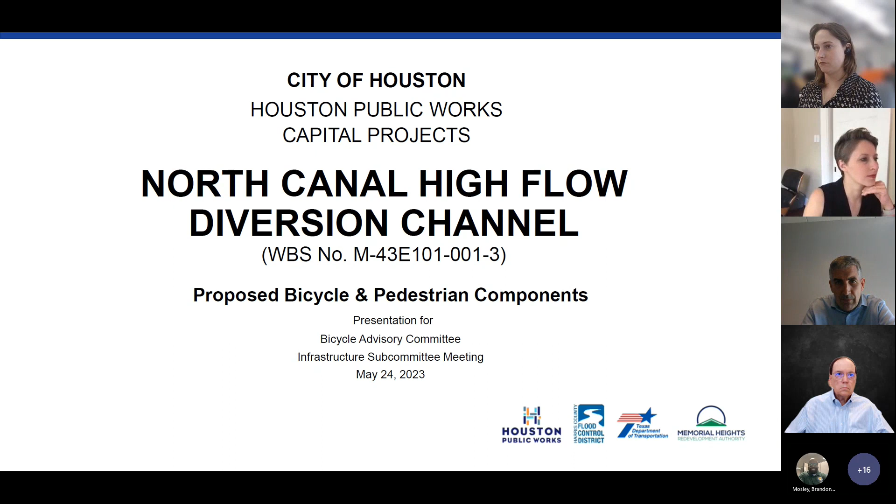Okay great, so I'll begin - I'll just flash my face for a bit so you can recognize me in the building or outside the building. Hello. So this project - well, I was asked by Tom Compson, he had a couple of questions, so I hope I'm able to answer his questions throughout the course of this presentation. But if you folks have other questions, or if he has other questions, feel free to stop me and we can discuss those as I'm going or at the end. Essentially, my presentation is intended to review the North Canal High Flow Diversion Channel project - that's my project, where I'm the project manager for the City of Houston. I work in capital projects, and the focus of this presentation is to review the proposed bicycle and pedestrian components of the project, and look at impacts to the existing facilities during construction and how we're accommodating for that. Next slide.

So let's give a real quick overview of some intro information. The project is federally funded, with a 35% federal component and roughly a 65% local component. Local funding partners are Flood Control, TIRZ 5, TxDOT, and the city is also a funding partner as well as leading the effort.

The city was the one who submitted the Harvey HMGP Hazard Mitigation Grant application, so we get the honor of leading the effort, and we're certainly coordinating with all those folks throughout the design effort.

The purpose of the project is simply this: it's not to mitigate for any one particular CIP project, city CIP project. It's really flood damage reduction. So we intend to make these improvements and reduce the floodplain within the project areas wherever we're impacting, or wherever we can make that impact.

Also, aesthetic enhancements are not a part of the federal FEMA scope. We can't create new trails or create new features such as that. But what we will be doing is replacing any impacted facilities.

So I'll turn that off. But what I can say is the project has another partner, a future amenities partner: Buffalo Bayou Partnership. At the North Canal area, they'll be the folks you'll see in the slides as we get to those, where they'll be providing those aesthetic improvements.

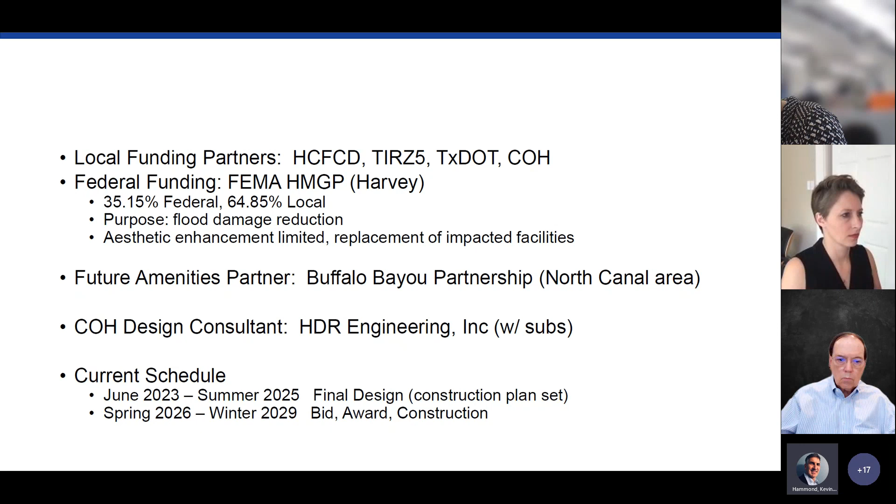Then we'll submit all that to FEMA, they'll hopefully approve our effort and award us FEMA Phase 2 construction. Then we'll move on to construction, a bid-award construction beginning spring of 2026 and running for roughly 3 years. So, next slide.

Okay, so this is the overall entire project limits. There are three primary areas here. I'll begin on the left side of the screen—that's the upstream-most component, the Yale Heights area. Yale Heights actually has a west and east component, but I'll dive into each of these areas in detail after the slide.

Overall, Yale Heights is the far upstream area on White Oak Bayou in the vicinity of I-10. Working downstream on White Oak Bayou, it strikes Buffalo Bayou at the confluence—that's the main feature of the project, the North Canal Diversion Channel. The cyan highlight shows the project limits per these areas. The North Canal Channel connects White Oak Bayou at the upstream end, pushes through developed property, city right-of-way, an active rail line, a Metro bus facility, and then connects that new channel segment with Buffalo Bayou on the downstream end.

The last component, the most downstream one, is the South Canal Channel or diversion detention area—again that's the cyan area. It's currently shown underneath existing I-59/I-69 infrastructure. The expectation is that TxDOT will come along with the North Houston Highway Improvement Project, relocate their infrastructure per their plans to the south, and allow the city to provide our enhancements in that area. It's essentially a smaller version of a canal in that section.

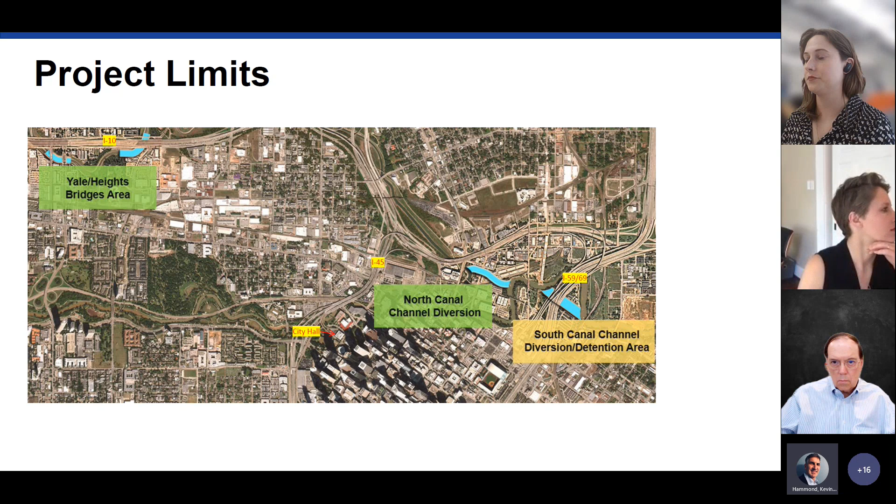So I'll dive into each of these areas beginning at Yale Heights. Next slide, please—Yale Heights area, next slide.

So this is a good before and after photo, from the city's preliminary design effort, from HDR's effort. On the left side, you'll see the existing White Oak Bayou channel, looking upstream at Yale Street.

It's a concrete lined channel with sloped side slopes. The important feature for you folks is on the left side of that image, the White Oak Bayou Greenway Trail, an existing off-street bikeway. The city's effort here is to improve conveyance, to move more water through that cross section. The way to do that is shown on the right side as proposed: we'll be widening the bottom width, removing the sloped sides of the channel, creating vertical walls. But the important thing is that we're retaining that White Oak Bayou Greenway Trail.

We don't intend to impact that trail. There will certainly be a drop off there, and we are providing railing for safety. But that essentially is the improvements, both at the Yale Heights area, the west side, and then the east side at Studemont. I think the next slide will show you the two areas in plan view.

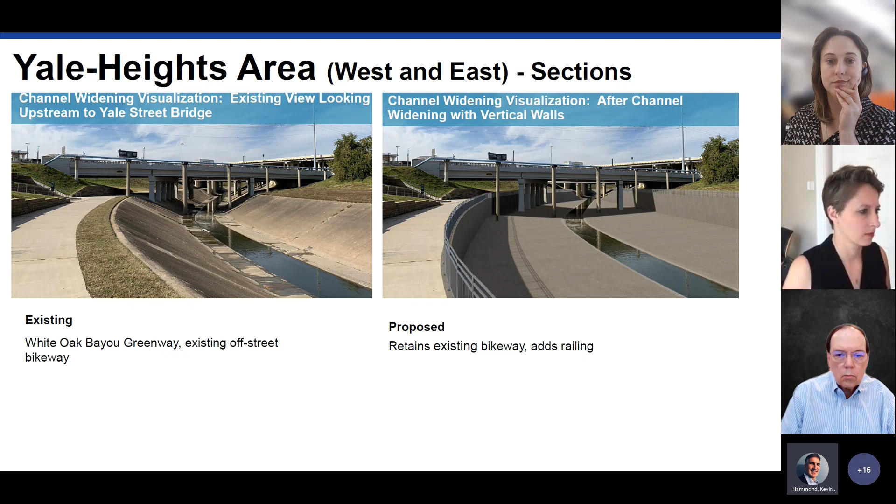So the left of the upper half of the screen is the west side improvement, around the Yale and Heights Boulevard area. It's probably tough to determine what's happening here, but essentially it's trying to convey that the tubular-like structure winding through the bayou represents the limits of work for the North Canal Channel.

So it's really just removing the slopes and providing a vertical drop to widen that bayou. On the right side are the east side improvements at Yale Heights, essentially the same thing—we're widening the bayou and retaining the trail as well. This is an area just west of Studemont and under IH10 for a component of that project.

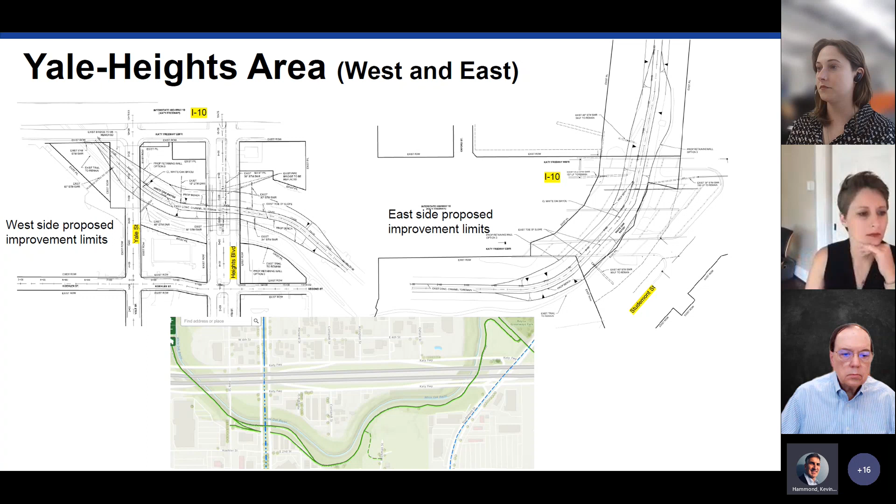The lower half of the screen is a snapshot from the city's bike plan, showing the White Oak Bayou Greenway Trail as a green line on the southern edge of White Oak Bayou. The right side is the Studemont area, and the left side is the Yale Heights area shown above. Next screen.

As far as impacts during construction, I don't have the benefit of having HDR here because they're not quite under contract for City of Houston Phase 2 final design. But I did work a little bit with Trent Rondot from Houston Parks and Recreation Board—I think he's here as well.

The idea is that during construction, we don't intend to impact the trail, and that's our goal. Of course, we don't have final design plans yet, so we'll work towards that goal. But there will be construction activity in the area, so at the very least, there may be a need for interrupting access to the trail during construction.

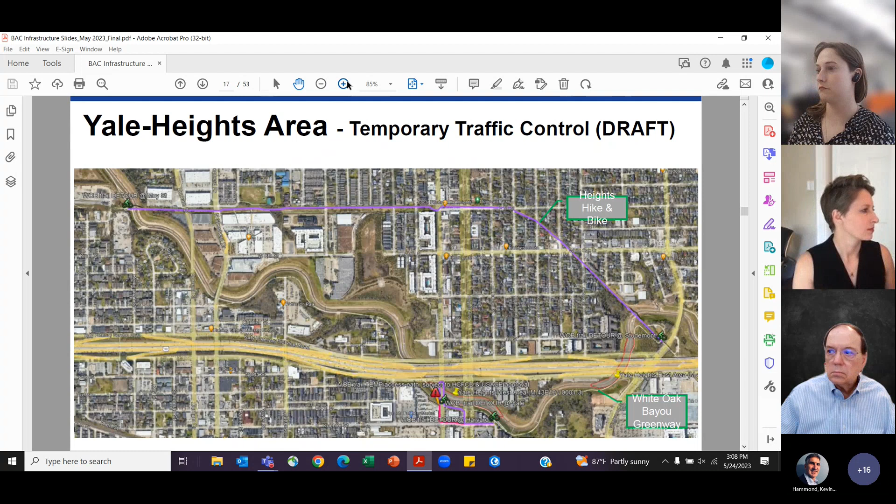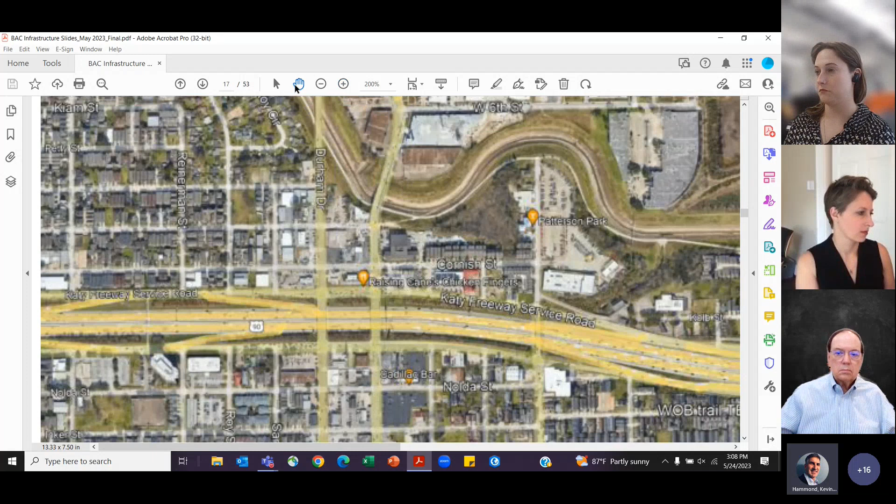Might be the closest we can get there, Kev. Okay, yeah, that's not really working out too well. Sorry, if you wanted to show the overall, I'll just explain it. Actually, there you go, it's better than the earlier.

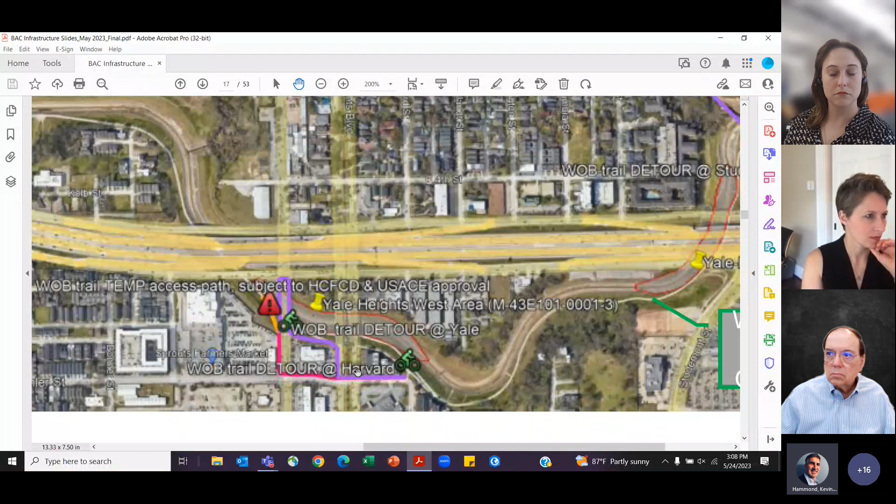So there's a purple line there, that's simply a detour. There may be an opportunity for a detour rather than have the long detour, it's actually 1.7 miles I think on that north hike and bike trail. There may be an opportunity for the work local at Yale and Heights to simply move them on city streets, city right of way, and get them from the downstream side to the upstream side, and vice versa, via either the purple route or the red route.

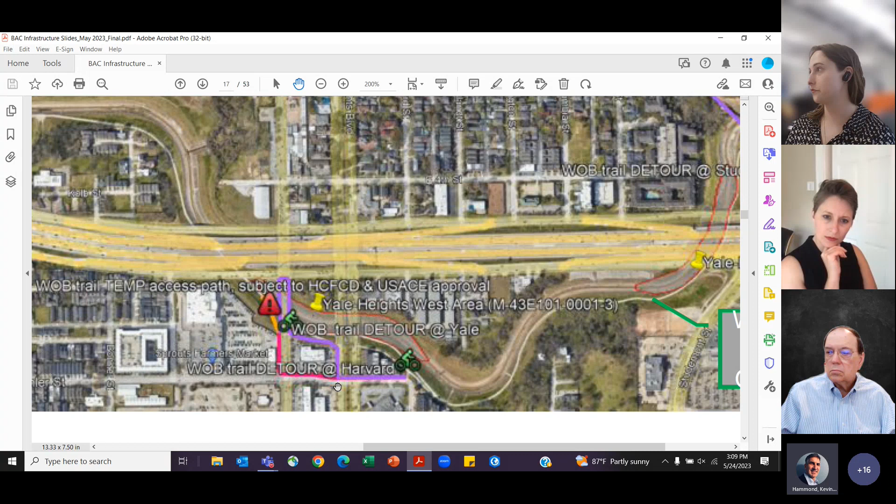It's going to require a temporary access way or access path along the embankment of White Oak Bayou. I understand that's fairly steep there, so that would be a design task for HDR to solve during phase 2 design. But there may be an opportunity to limit the detour, at least for just the work in this area here. So, okay, we can skip to the next slide.

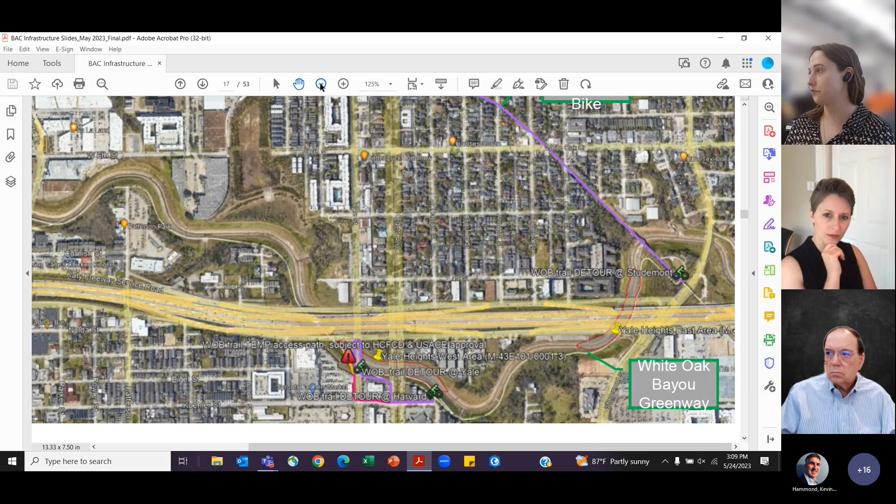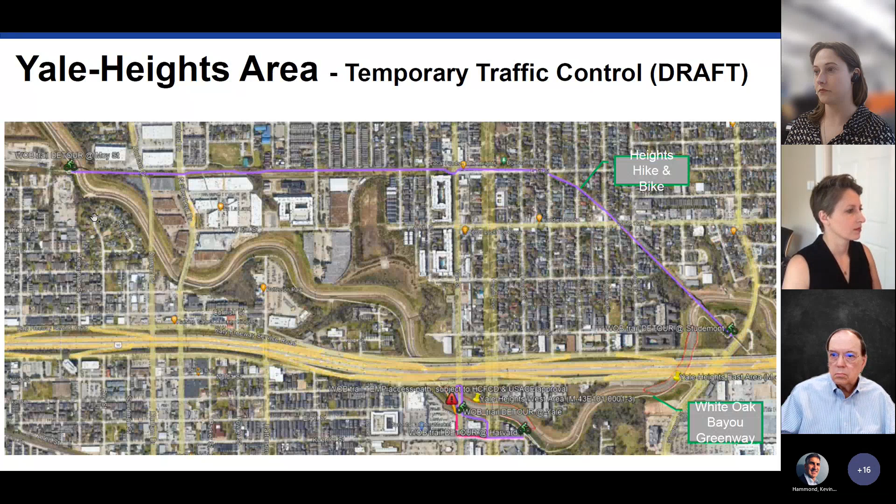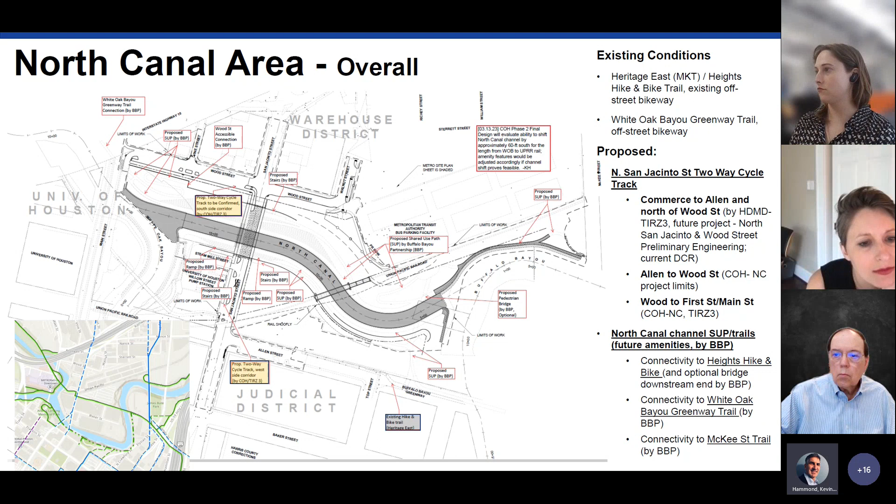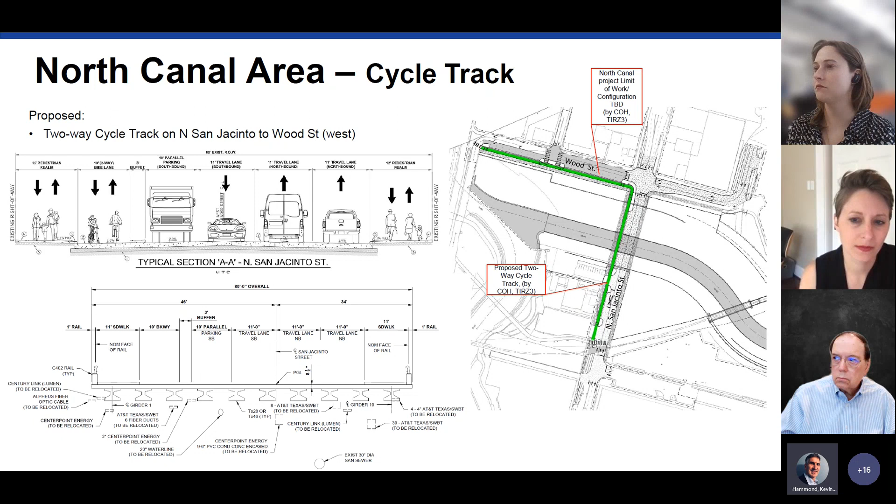So what I described was the city's limit of work. You're seeing Allen Street on the middle portion of this roadway corridor. This is North San Jacinto Street. So Allen Street is our south limit of work, and Wood Street is essentially our northern limit of work.

But outside of that, this schematic shows the connectivity of a two-way cycle track beginning at Commerce Street, running all the way through our project, and then running even further north of Wood Street on North San Jacinto Street. That is expected to happen via the Houston Downtown Management District's TIRZ 3 effort.

They have submitted a DCR, a design concept review. That was done last year, as I recall. They'll work through a DCR effort called the North San Jacinto Preliminary Engineering Effort.

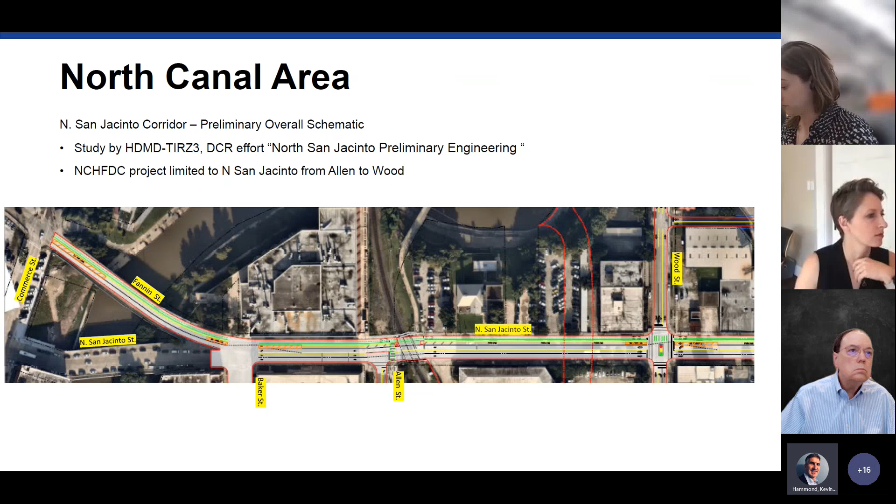They're expected to complete the remainder of the cycle track, the remainder of those improvements that is outside of the North Canal Channel's limit of work. Their improvements, I understand, would come after the North Canal project. Next slide.

This is simply another look. This is a plan sheet from the North Canal project's 30% design phase, the phase we just finished up last year. There's really not much more new information here to show.

It's just simply showing the bridge section, that there's 1, 2, 3, 4 abutments showing the vertical and darker line work of the abutments of the bridge. It just continues the same idea.

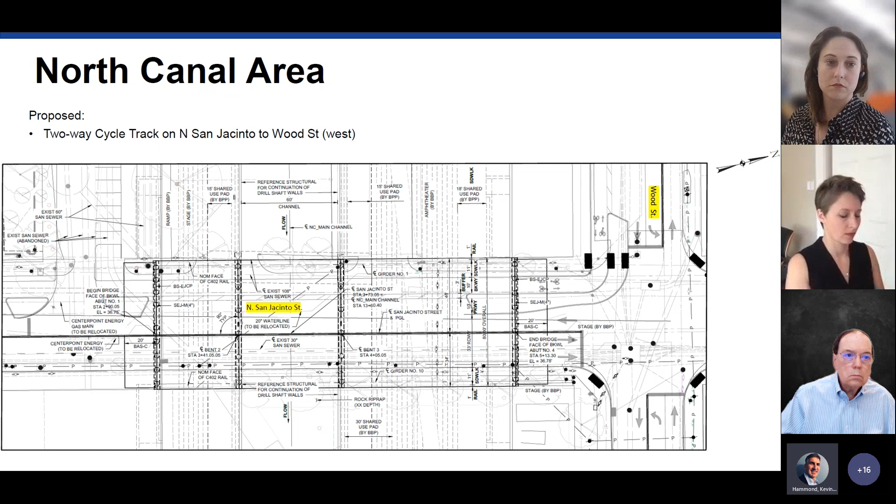And that's the cycle track on the northern half of the shown roadway corridor. I should actually say it's the western half of this roadway corridor, as north is to the right. Next slide, please.

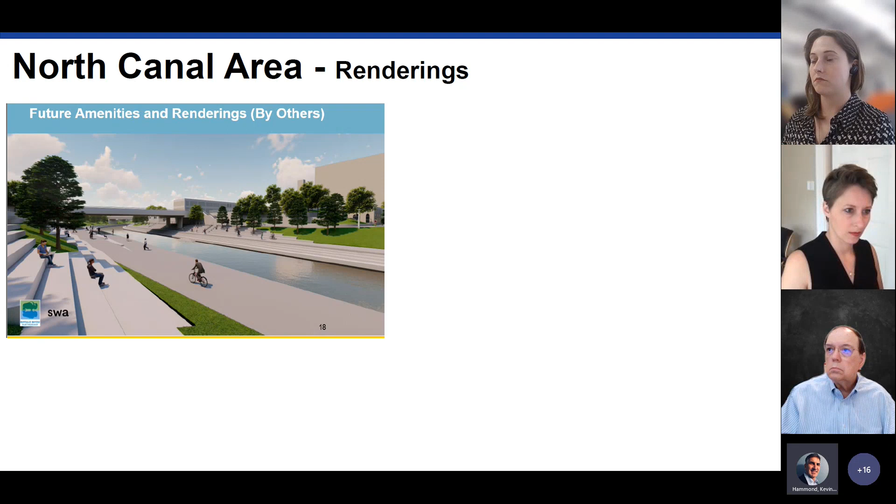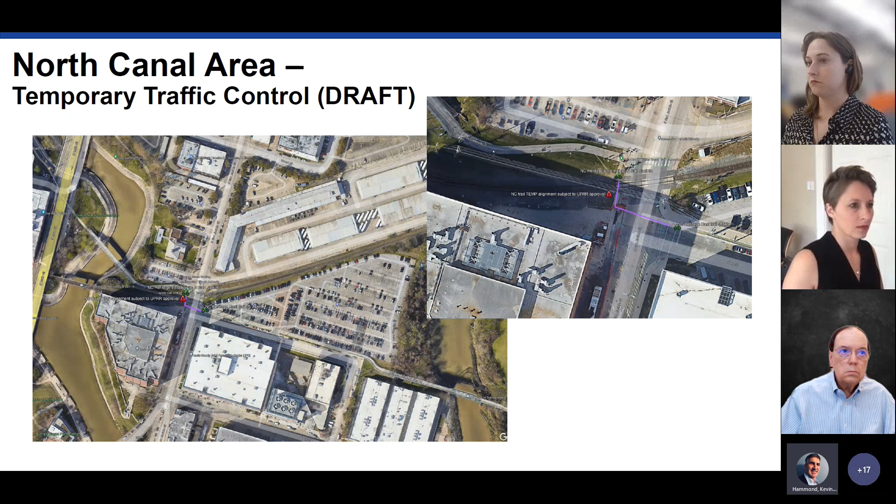So the final project area is South Canal. Next slide.

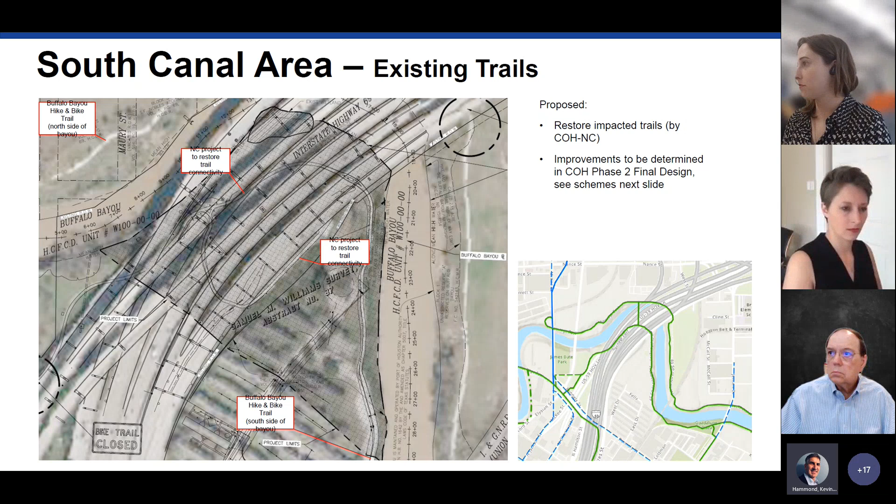So our task will be to restore connectivity. Next slide.

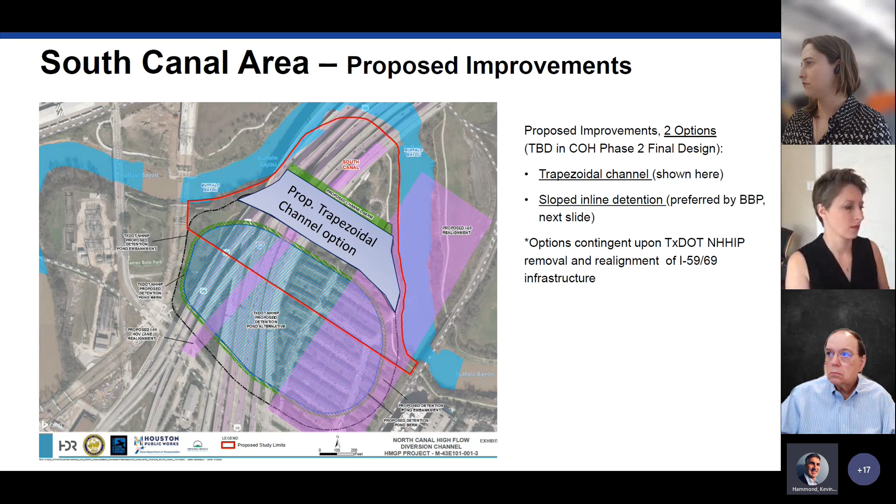There's also another option, a sloped inline detention option. That's actually the one preferred by Buffalo Bayou Partnership. We'll look more keenly at that, as well as the trapezoidal channel, once we get to phase 2 final design. I'll show that in the next slide.

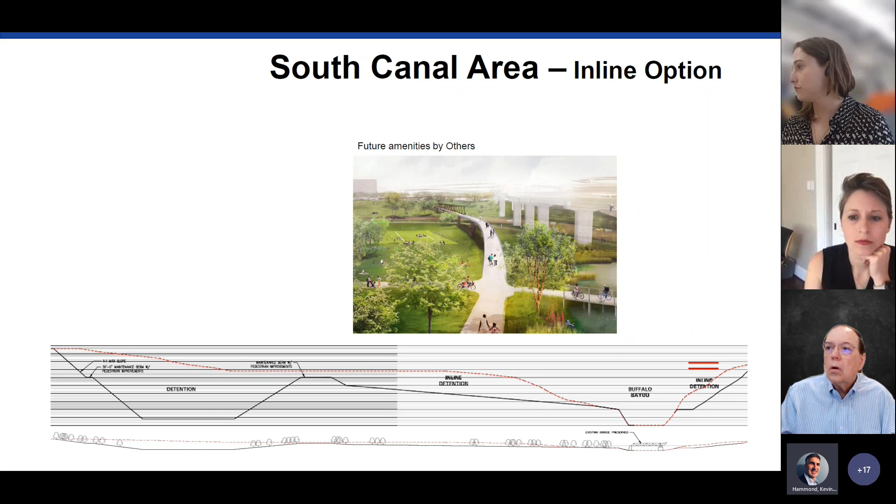Next slide. So this is the mitigation for impacting the existing trails. The purple line work essentially shows, on the bottom right, the south bank of Buffalo Bayou, in the former Clayton Homes subdivision. It would provide connectivity via the existing trail—the purple line work then runs south to Runnels Street, then runs northward on Runnels, connects to the bikeway trail on McKee Street, crosses Buffalo Bayou following the purple line, loops around on the north bank of Buffalo Bayou, and then provides connectivity to the north side of Buffalo Bayou.

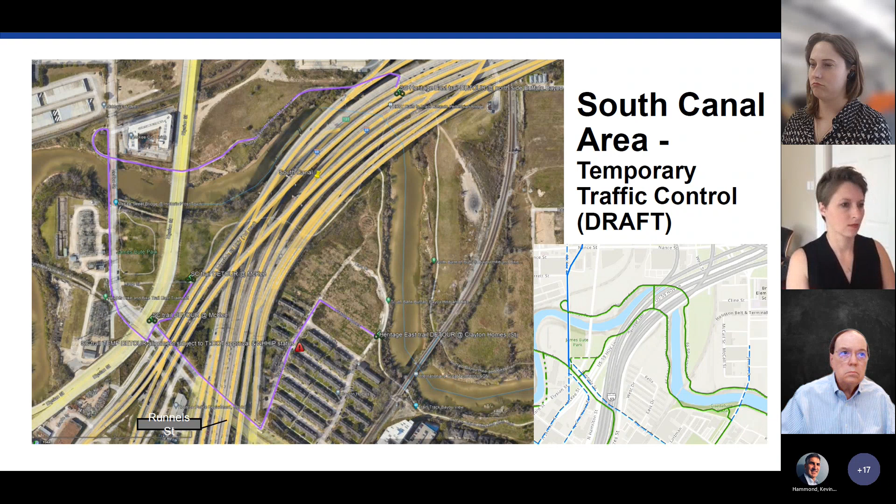That's one option I expect our consultant to look at once we get to phase 2 final design, which is upcoming. Next slide. We can pause here—there are other exhibits, but they're really more enhancements to what I've already shown. I don't think we need to delve into those, so I'll stop there. If there are questions, I'd be happy to answer them.

Thanks for that presentation, Kevin, that was really informative. I think a couple questions—Trevor Reichman raised one of them. At the Yale portion of the project, that trail has become popular. I think the detours are going to be of significant concern to the biking community, and it would be really helpful if we could have an opportunity to participate in that part of the design with whomever is involved, from both the city and the contractor.

Okay, so noting that, I don't see why we can't expand—during phase 1 final preliminary design, we had two essentially monthly progress meetings, one with internal funding partners and one with stakeholders. So we'd look to include you folks in a stakeholder meeting once we get rolling in phase 2 final design.

That'd be great. And I just had a question on the new cycle track that's going to be going north on San Jacinto and then west on Wood Street. What is it connecting to on the west end of Wood Street? It looks like it's going under Main Street, and then I can't tell what it's doing after that.

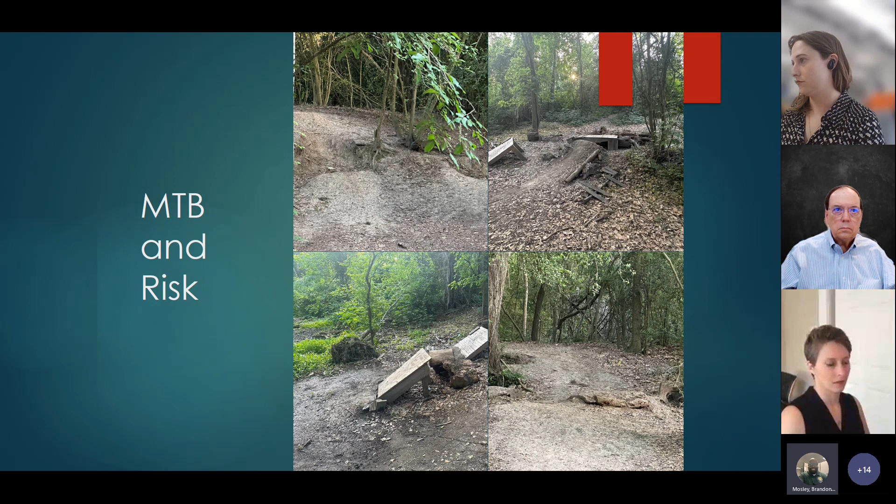One of the biggest challenges for us in mountain bike is when we talk about mountain bike and risk, and essentially mitigating that risk that's out there, because obviously there are some things as the evolution of mountain bike has changed over the years. There's a lot of things that have been added. One of the main key things is the jumping and drops—it's kind of what the real love is, the excitement, the adrenaline rush.

And most people probably imagine that first picture there that I've got up of what's built out there. I'm going to tell you that's actually on private property. It's behind my local HOA, and that's built by a bunch of 7- and 8-year-olds. So we'll go to the next slide.

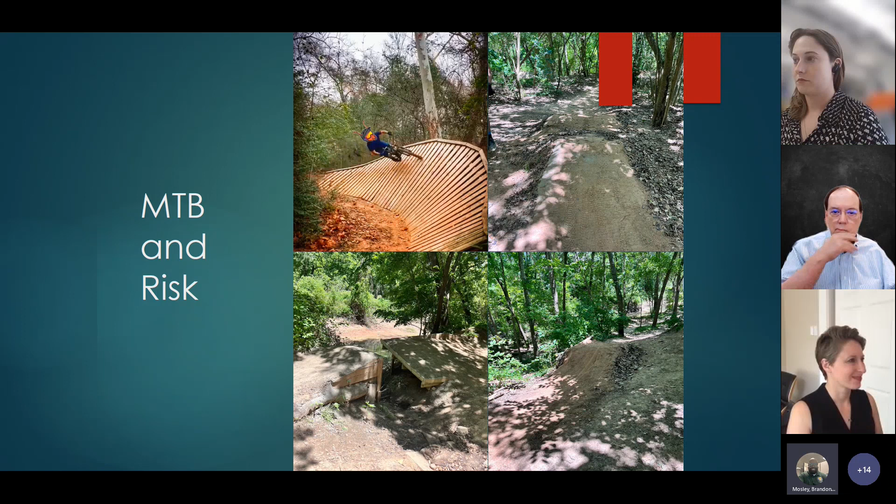All right, going on to the next slide.

So today, for those of you who don't know where Bentonville, Arkansas is, I would encourage you to Google Bentonville, Arkansas. If you want to go a step further, also Google the Bentonville Walton Family Foundation Study. At the beginning, I talked about over 2,000 miles of undeveloped bayou land connecting off Houston. While we'll never be Bentonville in the scope of terrain and elevation, we have something in Houston they don't have in Arkansas - a very unique ecosystem. If you've ever been on Cypress Creek, the Anthills, Jack Brooks, or up north in Huntsville State Park, we have beautiful, wonderful environments from bayous to wetlands to coastal lands to pinelands. We have beautiful areas to explore.

The other thing is 7 to 8 months out of the year, we have great riding weather. Now, 4 of them you've got to be pretty tough to survive, but you can still ride year-round in Houston. If we had something to attract people, it would be a massive impact, and a wonderful thing for our city to be known for more than just oil and gas and concrete.

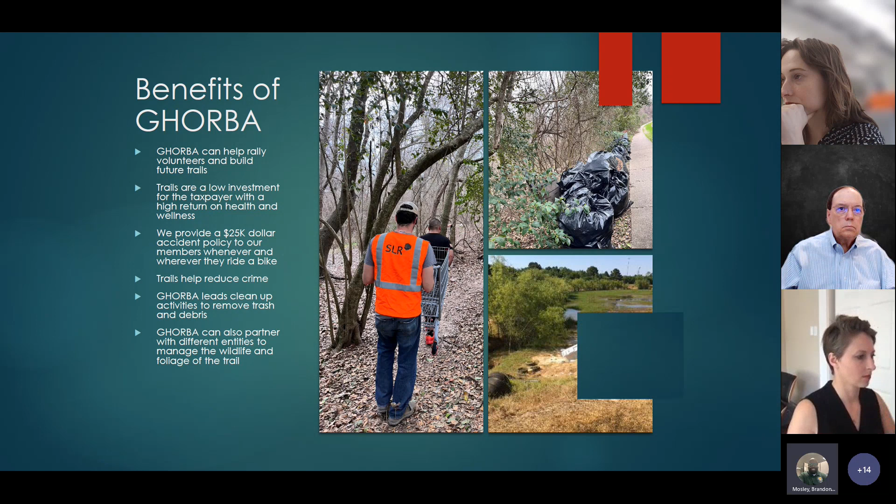I have a question. Do you have any people in your organization with e-bikes? Yes, we're a big proponent of e-bikes. Just to be clear, there are class 1, class 2, and class 3 e-bikes. Our trails are specific to class 1 e-bikes, because there's no throttle, it cannot be throttle assist, it has to be pedal assist only essentially.

Thanks for this, Brandon, this is really great. So would you define pump track for me?

Man, I don't suppose you can pull up Google and pull up a Velosolutions pump track real quick. Basically, they take and shape the dirt around there and lay asphalt on top of it. Essentially the basics of BMX, mountain biking, and any type of trail riding is pumping. It's basically, if you can imagine, you have rollers and then you'll have basically bowls that come up. I got a picture, it's hard to explain. It's called a pump track. A pump track? A pump track. Okay, let me see if I can post it in the chat.

Yes, while you're looking that up, I think I mentioned this to you before, Brandon, and of course you know Joe Hood, but I think one of his dreams is to put something like that under I-10 adjacent to the MKT trail or Heritage West, whatever it's called there. I don't know if that'll ever come to fruition, but I think it's also been identified as part of the Two Bridges project in that same general area, to convert what's essentially unutilized and sometimes wasted space underneath those huge interstate bridges to something useful. I think it's a cool idea. I don't know if that's on GHORBA's radar screen or not.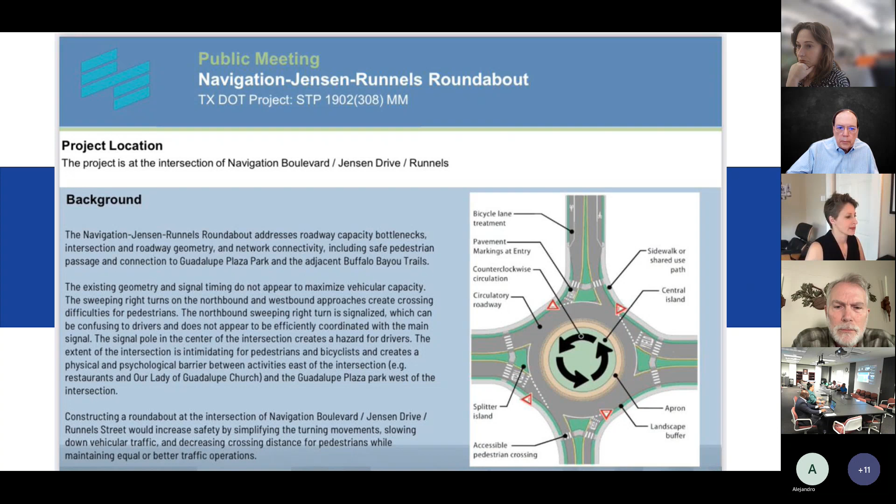Mike, did you have some input? Not particularly on this one, but there is a roundabout near my home, Washington Westcott, and that is going to be redone starting in June. At any rate, what we see happen there may be an indication of how things get implemented, because they were supposed to put in some raised crosswalks there.

I don't know how much accommodation for cyclists is going to be made, so we'll wait and see. Yeah, so I guess they're not really changing the fundamental design there, are they, Mike? It's essentially resurfacing, and like you said, putting in the raised crosswalks is, of course, a great idea. Curbing, and they will adjust the paved surface widths, because there were people going two lanes around where they weren't supposed to be, and that was causing a lot of conflict in the traffic circle. Yeah, okay.

So anything Misty and Brandon can find out for us and share at a future meeting would be helpful. I'm not sure what the timing is on this, or if it even says there. It does say they have a public meeting coming up. I don't know if there'll be a virtual option on that, but they do have a contact, so that's good.

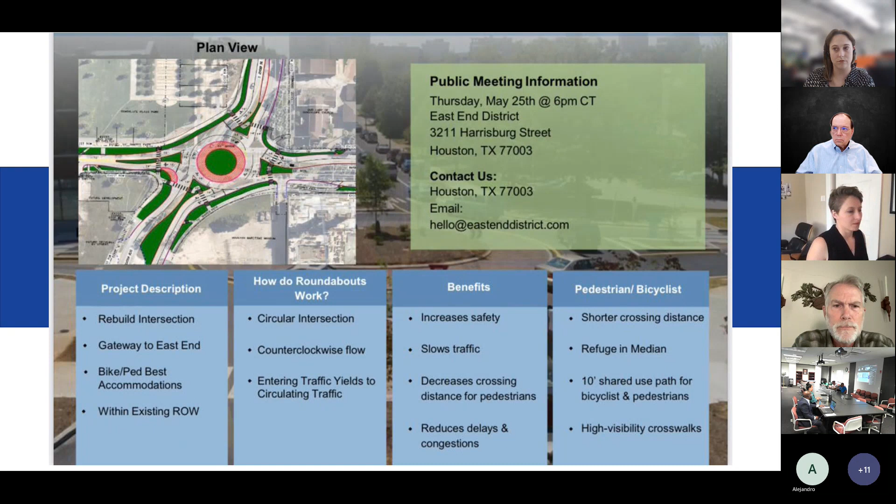I was muted. But I also wanted to talk about, remember the small projects that we had that we could address with the budget? The thing we were talking about was the San Jacinto median. I don't know if that was already implemented, but passing through there and thinking about the recent conversation and presentation about changes coming to that area as well, how is that affected?

And again, the issue is not knowing the details, the planning details from what David and the team have thought about, or going to the next project if that's already completed. What else can we look at?

David had mentioned, I think it's the Main Street project that hasn't happened yet, and they had some changes in design standards, so they're having to go back to rebid the project. The good news is that the dollars roll over to next year's budget, so they'll still be there even though the project's delayed. Brandon or Misty, did you want to elaborate on that? No, you're correct, that's basically what it is.